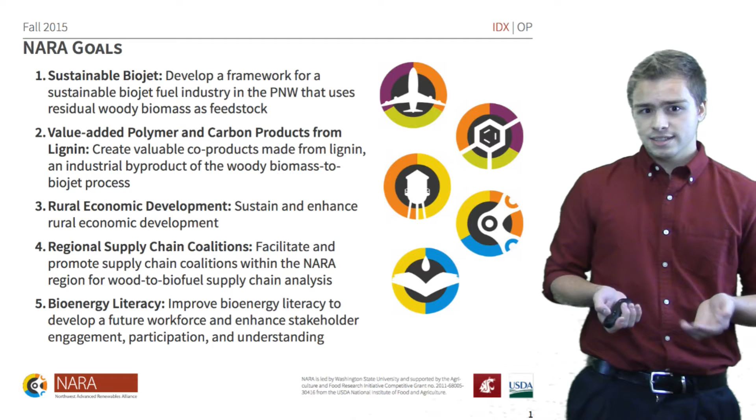They're to develop a framework for a sustainable biojet fuel industry in the Pacific Northwest, to create products from lignin, which will be co-products, sustain and enhance rural economic development, facilitate and promote regional supply chain coalitions, and improve bioenergy literacy. The purpose of IDX is supply chain analysis, but we want to align our goals with NARA's as much as possible. Here's a graphical representation of our supply chain.

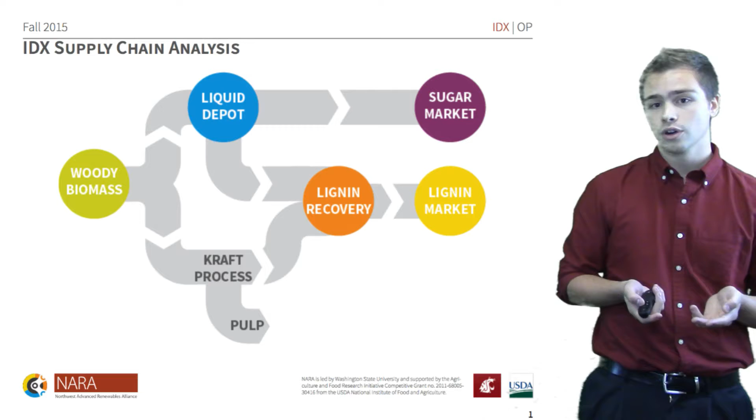We're going to be discussing each portion in teams of 2, but very simply stated, it begins with moving woody biomass to a pulp and paper mill where a liquids depot will be located. Here it is treated and the biomass is separated into lignin and a sugar slurry. Lignin products can then move to the lignin market after a recovery process, and the sugar slurry can go straight to a sugar market where it can be further refined into isobutanol and ultimately jet fuel.

We're going to begin with the woody biomass. The team responsible for this portion consists of myself and Tyler Kerschner. Biomass is organic material from a plant or animal that is available on a renewable basis. We're concerned with woody biomass, specifically softwood forest residuals. This includes tree tops, limbs, stumps, essentially all the non-merchantable wood byproducts left after a commercial harvest or thinning operation.

Now normally these residuals are put into piles, which are called slash piles, and then burned for wildfire mitigation. We however want to utilize this resource. Burning slash is a waste. Environmentally, using residuals as feedstock for biofuels reduces carbon and greenhouse gas emissions by reducing the use of petroleum-based fuels.

A social benefit to using biofuels is a step closer to energy independence, which requires diversified energy sources. Now, energy security, or at least less of a dependence on foreign oil, has strong social support. Economically, the low cost of crude oil right now most likely prevents biofuels from being cost competitive with fossil fuels. However, the price of oil is very unstable. We've especially seen this in the past 15 months. The price of oil will rebound, which will hopefully lead to a profitable biofuel industry.

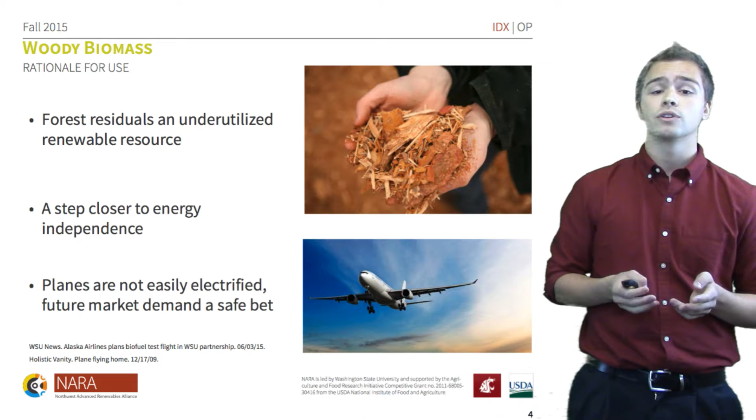And we chose to focus on the aviation market for biofuel because it's a safe bet. PricewaterhouseCoopers and the FAA in separate reports have projected that air traffic will double over the next 20 years. We also know that planes are not easily electrified.

So our supply chain analysis is on the Olympic Peninsula in western Washington. The Olympic Peninsula has an abundance of woody biomass and was also selected in part due to the willingness of stakeholders in the region to work with IDX. We're currently looking into 2 pulp and paper mills to co-locate a biofuels conversion facility, which is going to include a liquids depot and a lignin recovery facility.

The 2 mills are the Port Townsend Paper Company in Jefferson County and the Nippon Paper Industries mill in Clallam County, which is in Port Angeles. The accessibility of both these mills is pretty good. Port Angeles is located along Highway 101, and Jefferson County is just a few miles north of it. They're both also relatively close to the SeaTac Airport, which is a huge jet fuel market.

And now from one Olympic Peninsula native to another, here to discuss the availability of woody biomass on the peninsula and the costs associated with the collection, processing, and transportation of it to the mills is Tyler Kerschner.

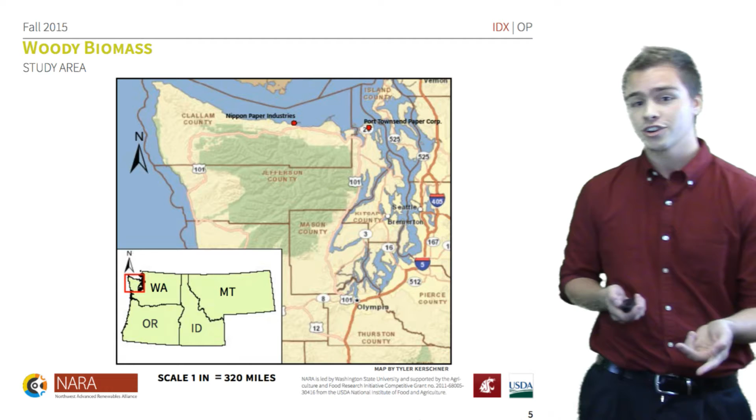Hello, I'm going to present you with the cost and supply data for our supply chain analysis. This was used to determine that it was both economically feasible and sustainable on the Olympic Peninsula. The first important factor in determining whether or not this would work was to make sure there was a sustainable supply of woody biomass available on the Olympic Peninsula.

This was done using ArcGIS to use specified radiuses to have an area, and then using NARA TPO woody biomass density data to find volumes in bone-dry tons of woody biomass availability. An important thing to note is that the darker the green on these maps, the higher the woody biomass availability density in those locations. Our first location we looked at was Port Townsend Paper Corporation.

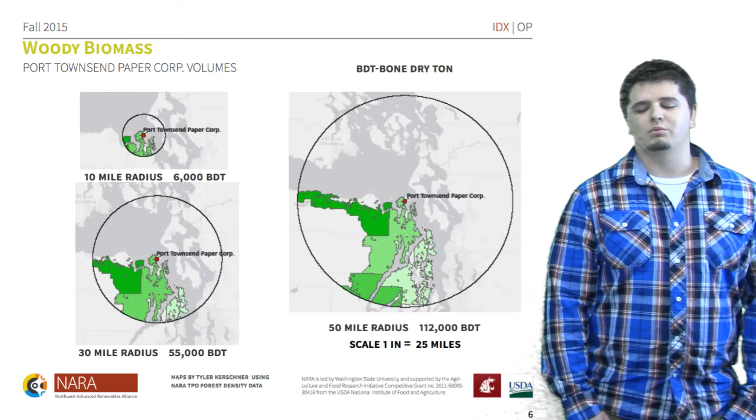As you can see, as the radius grew, the biomass available grew exponentially, with the 50-mile radius having 112,000 bone-dry tons of woody biomass available, whereas a 10-mile radius only has 6,000 bone-dry tons available. The second location we looked at was Nippon Paper Industries in Port Angeles, Washington.

As you can see, there's a much higher density of woody biomass available in the 50-mile radius. In fact, it is double that of Port Townsend Paper at 224,000 bone-dry tons. This is largely due to its vicinity to western Clallam County, which is far less populated and has a higher density of woody biomass available.

Another important factor in determining whether or not this supply chain analysis would work is the cost. This was done using the USFS transportation costing model. This is a very good model, but not exact due to it being based on some assumptions. Those assumptions include an assumed solid volume factor, an assumed moisture content, and assuming that all wood species harvested would be Douglas fir. Along with that, it is also only purely based on cost. It does not take into account profit, taxes, or anything else like that.

As far as assumptions we made when running the model, we assumed a 10-mile gravel road to 20-mile two-lane paved to 20-mile state highway ratio for a 50-mile radius, and used that same ratio for the smaller radii. As you can see, the prices vary depending on what truck you use to transport the chips. A 150 cubic yard truck is around $50 a bone-dry ton, which is shown in the picture at the top of the slide, whereas a 100 cubic yard truck, which is a typical roll-off truck, is over $60 a bone-dry ton. So it's more feasible to use the bigger trucks if they're available.

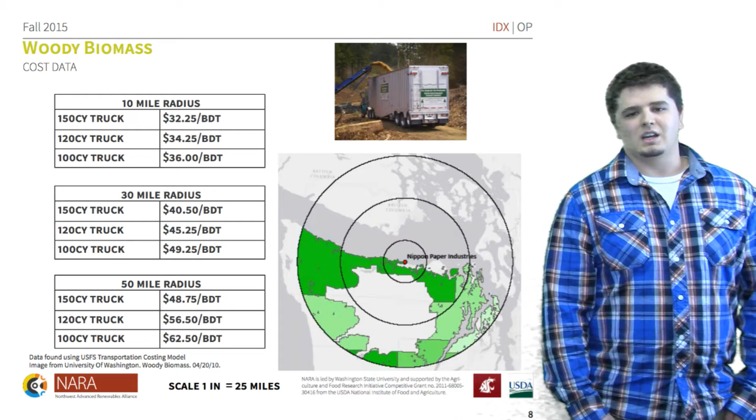Once the woody chips get to the mill gate, the next part of our process is the liquids depot, which Desiree will tell you about. Hi, my name is Desiree Seiler, and I'm going to be talking about the liquids depot, which is the second step in the NARA process, along with my classmate Dane.

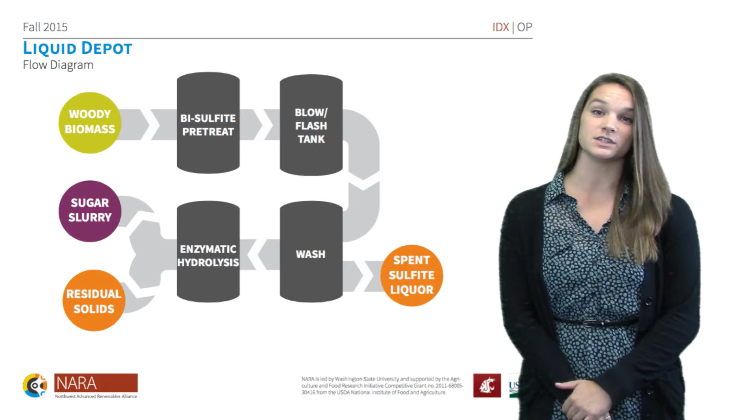This graphic shows a general overview of the processes that go on in the liquids depot. Once the wood chips go through these processes, they will be transformed into a fermentable sugar slurry and a lignin byproduct. The first step for these wood chips when they enter the liquids depot is to go into a digester, which is where the calcium bisulfite pretreatment occurs.

Steam is also introduced into this chemical process, and any heat made is then recycled back into the depot as an energy source. Optimal digester parameters were found to be 145 degrees Celsius, a pressure of 315 kilopascals, a cook time ranging between 180 and 240 minutes, and a general water to feedstock ratio of 4:1.

All of this data and numerous other experiments can be found on the NARA cumulative report, which really shows that these parameters are truly the most effective and efficient way to extract sugar from our woody biomass. Once the wood chips go through the digester, they're then in the form of a pretreatment liquor.

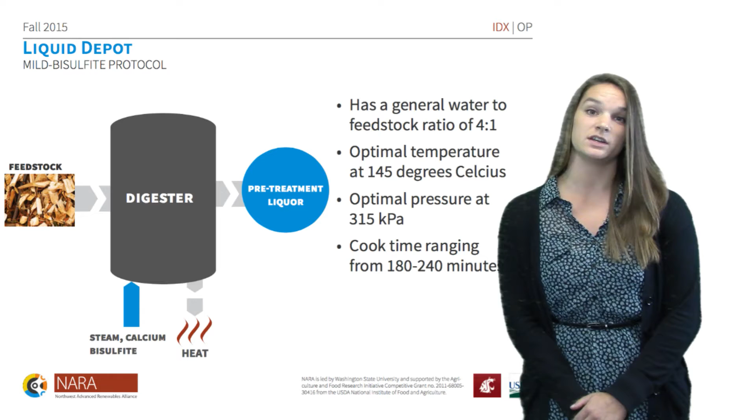The pretreatment liquor is then sent off to a blow and a flash tank, where both the temperature and pressure of the liquor is reduced. Again, any heat coming out of this process is recycled back into the depot as an energy source.

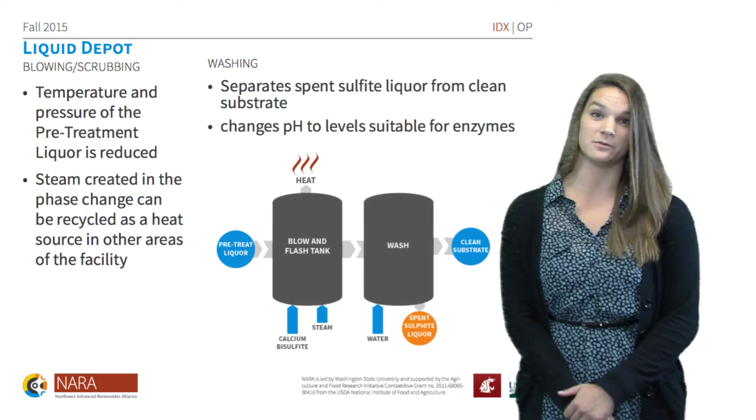Once the liquor goes through the blow and flash tank, it enters a washing station, which mainly flushes out any excess liquids and results in a spent sulfite liquor, which is sent off to the lignin recovery depot, and a sugar slurry, which will then go through an enzymatic hydrolysis, which Dane will now talk about.

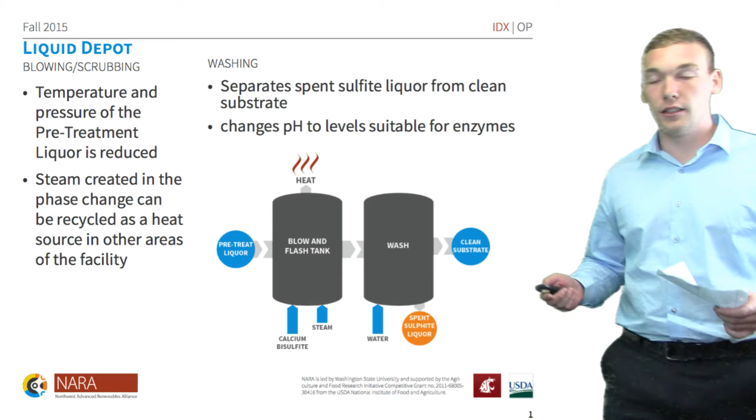Thanks, Destry. So I'm Dane Kamenzine, and I'll be covering the latter portion of the processes that occur in the liquid depot. The first of those that I'd like to talk about is enzymatic hydrolysis. Its main purpose is to convert cellulose and hemicellulose into fermentable sugars, such as glucose. It's a process that we should all be familiar with because it occurs in our stomachs every day.

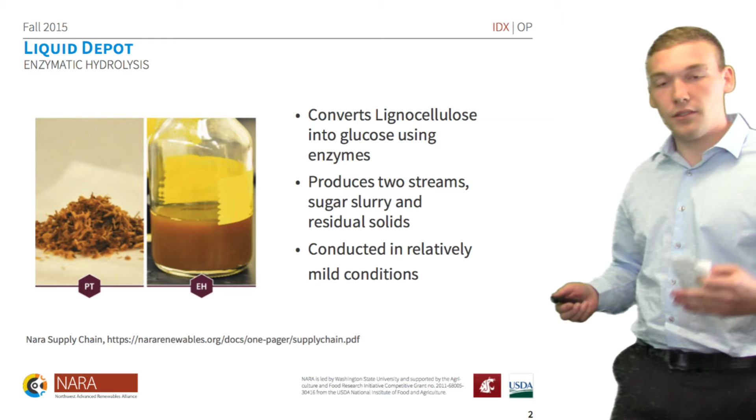And in this situation, we're going to produce two streams, a liquid sugar slurry and a residual solid bunch that contains mostly insoluble lignin. And one of the big advantages of this is that it's conducted in relatively mild conditions. You can see in that picture on the left, it's the material that goes into enzymatic hydrolysis, and on the right, it's the sugar slurry that comes out of enzymatic hydrolysis.

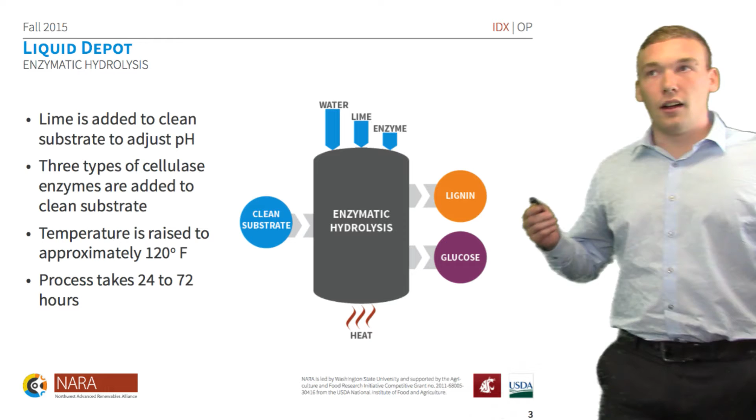This diagram represents everything that comes into the enzymatic hydrolysis process. Water is added, lime is added to raise the pH, and then the enzymes can be added. We have three types of cellulase enzymes. Once the enzymes are added, we can raise the temperature to approximately 120 degrees Fahrenheit or 50 degrees Celsius. And on an industrial scale, the process will take about 72 hours.

Hi, my name is Taylor, and I'm joined here with Victor, and we're going to be talking to you today about the market for our sugar slurry as the sugar is produced out of the liquid depot. When doing our sugar market analysis, we looked specifically at other potential markets other than the aviation industry because we know that there's a potential market for our biofuel that way. But we wanted to make sure that in case that supply chain would have changed, we could look and make sure that our sugar could be sold elsewhere.

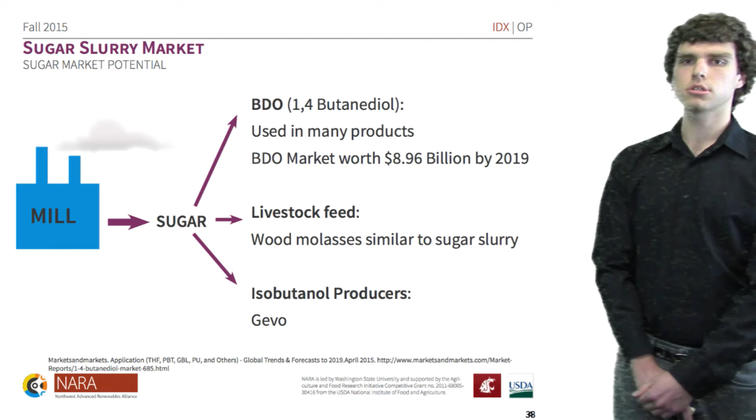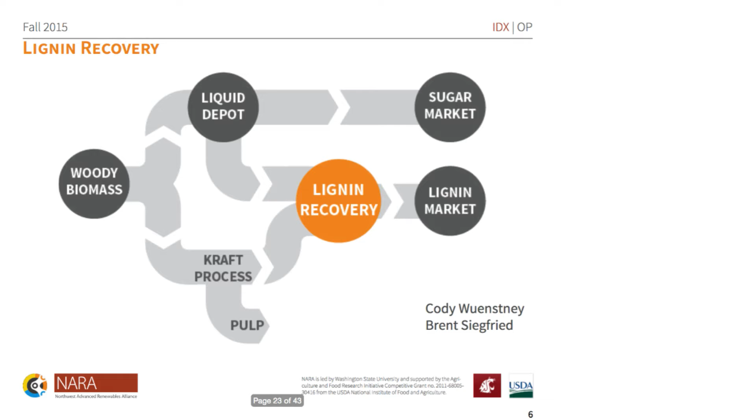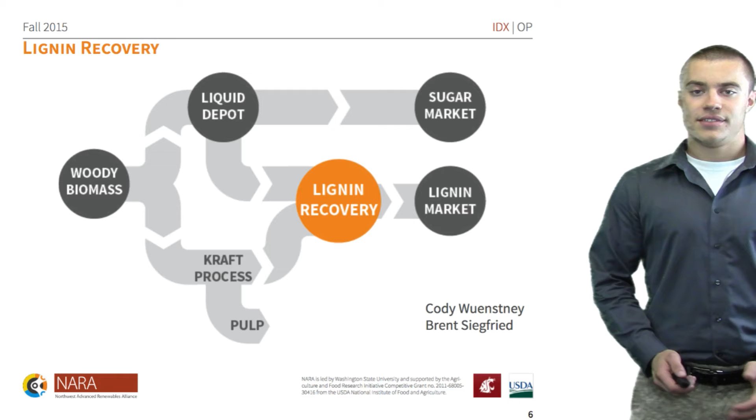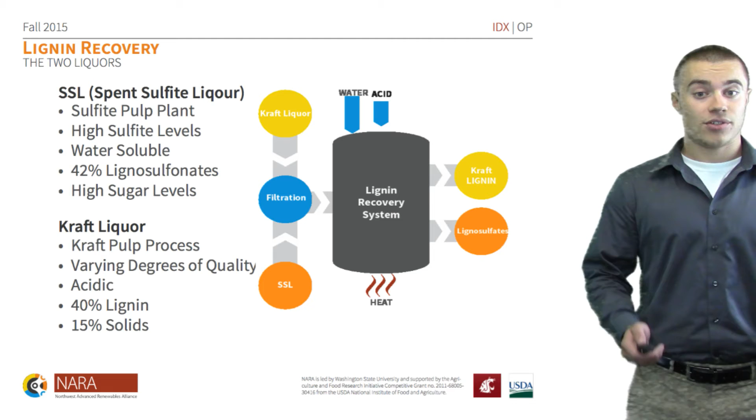Thanks, Brent. So looking at the incoming streams of lignin into our lignin recovery facility, there's a key characteristic that differentiates the two liquors. Spent sulfite liquor is water soluble, whereas kraft liquor is acid soluble.

What this means is that to get lignin out of spent sulfite liquor, we need to precipitate it with calcium hydroxide. This solution is then pushed through a semi-permeable membrane where the lignin is separated from the rest of the slurry. This process is called ultrafiltration, and more specifically, the Howard process, and is used in sulfite mills around the world.

In contrast, lignin recovery from kraft liquor is a very heavily researched field right now because kraft liquor is primarily used to fire the boilers in the mill, as Brent previously mentioned. But there are several companies that have developed and implemented systems for the recovery of kraft lignin from the liquor, and I have provided a simplified flowchart of their process.

First, an acid is added to this solution, usually carbon dioxide. It is then precipitated, coagulated, filtered, dried, and ground into a dried powder. This powder can then be bagged and transported on trucks to its final destination. And out of our system comes two separate forms of lignin, the lignosulfonates and the kraft lignin. And here to talk a little bit more about what we can do with these lignins is Joe Malloy.

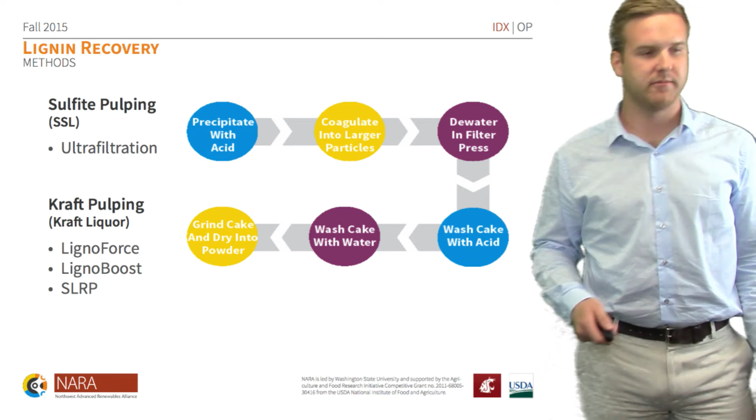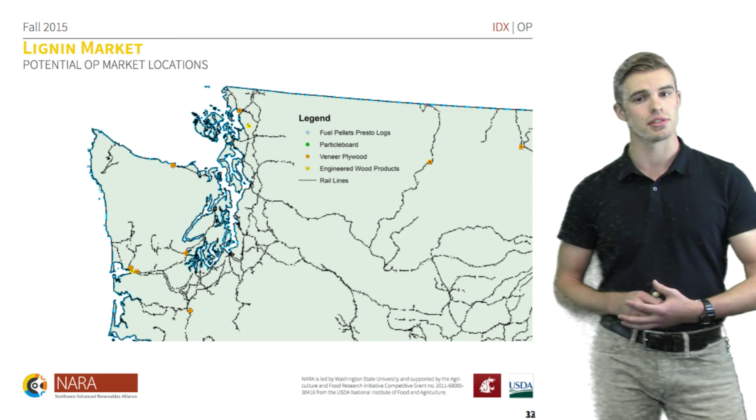In conclusion, as far as the lignin side of things, as you've no doubt seen, there's really tremendous future growth in so many different ways that you could use lignin. It adds a key component, a key revenue stream. Rather than wasting a co-product in these biorefining processes, use that as a revenue stream using your already existing material. Global investment: you've seen from my slides that both governments and private industry have been heavily investing in this product right now as we speak. We have an opportunity here in the Northwest, we really do, to gain a strategic foothold, if you will, in this expanding market in the future.